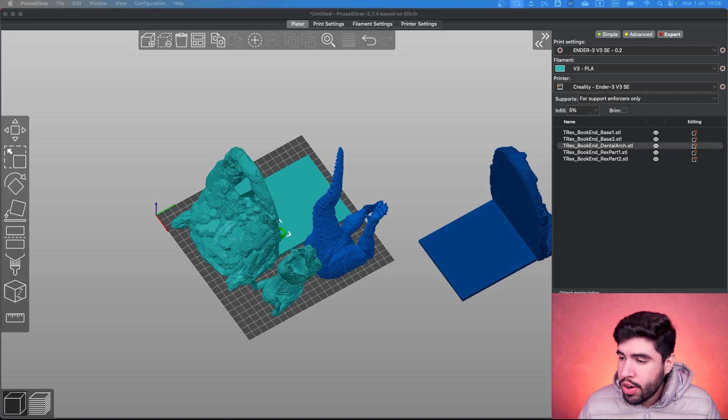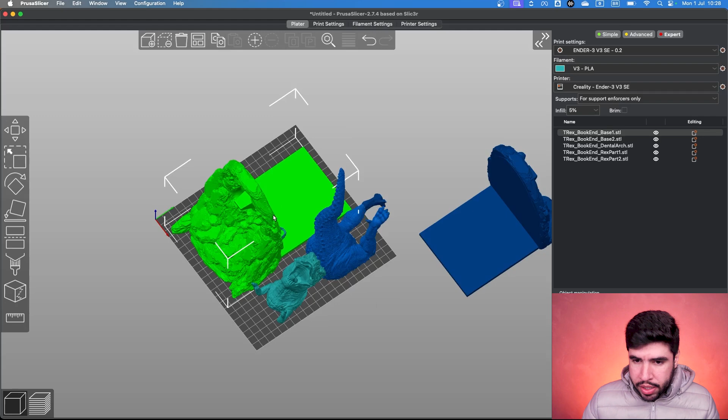Alright guys, as you can see, we have multiple parts to print this complete model here. We have the rocks and the dinosaur body. We are going to start with the easiest parts here, which are the rocks. They are simpler because we have more adhesion between the print and the build plate. Since the body that has more details is separate, we can print this with thicker layer heights to improve the

print time. Okay, so I'm going to use my standard profile for 0.32 layer height in this one, and then we are going to save some printing time. And now I'm going to show you which things you should change on your standard profile as well. The layer height, of course, 0.32, and in the advanced options, we have extrusion width, which I'm going to use

0.48 millimeters. Okay, this is because we have a thicker layer height and I want to increase the extrusion width as well to keep the layers attached to each other. Okay, I'm not going to change anything else. I'm going to use 3 perimeters, 6 top solid layers, 4 at the bottom, 5% infill. Let me see. And I'm going to keep the speed settings as well.

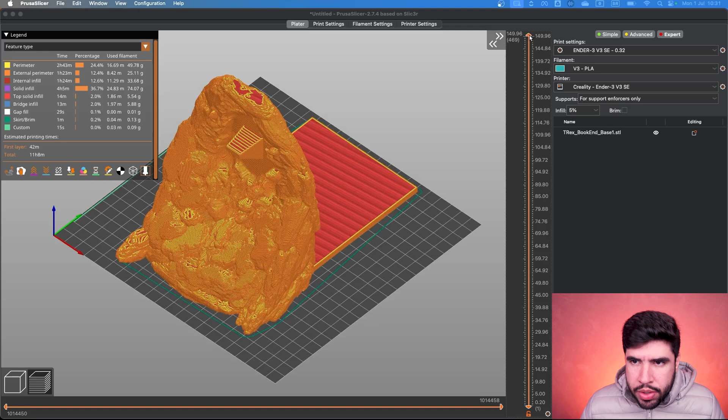These ones that you are seeing, I'm using an Ender 3 V3 SE, so I'm going to keep this low. Now let's slice this guy. Okay, I think we don't have any secrets left in here. As you can see, we have a good first layer on this print, and the thicker layer heights are going to give you a good texture as well in the rocks.

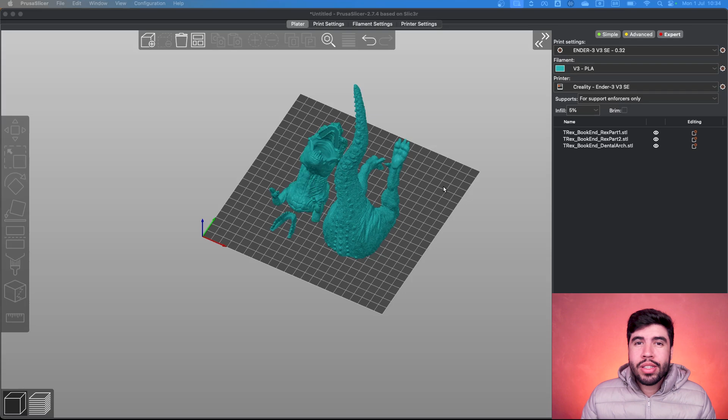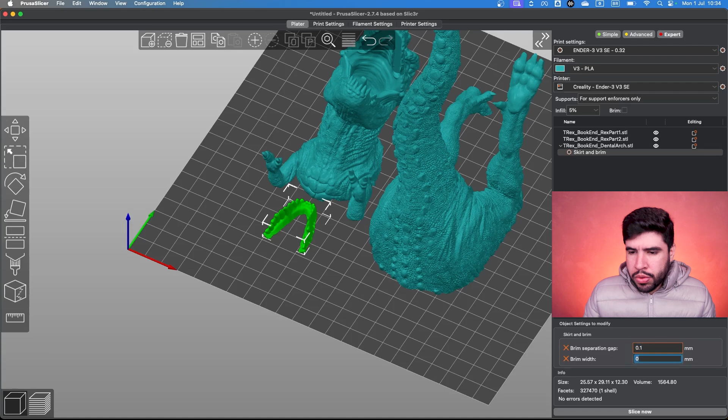So now let's talk about the body of the dinosaur. Now I'm gonna show you 2 tricks to print those parts together using as little brim as possible. Starting with the dental arch, you can right click on it and select add settings, and we have here skirt and brim, and we are going to put only brim on this one, and then brim width, and let's select brim separation gap as well. Okay, and now we can put 0.1 just to be easier to remove, and the brim width 5 millimeters.

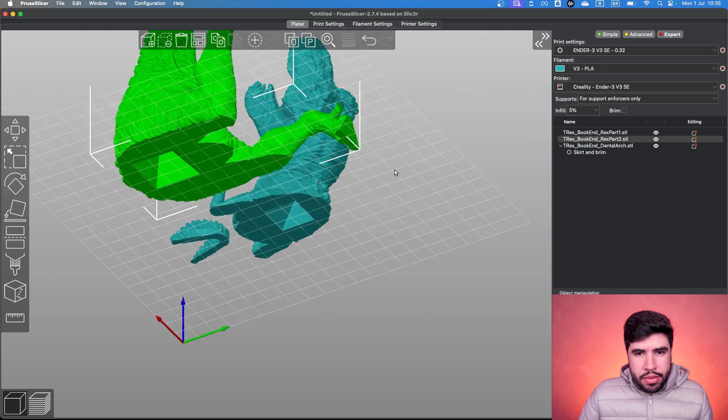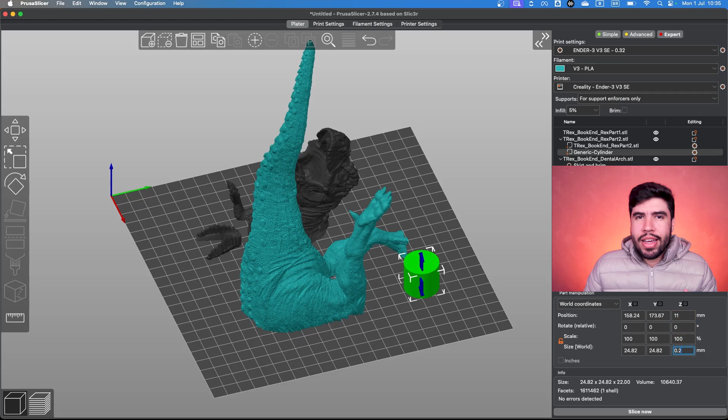And we don't need to use brim in the dinosaur's head, but the back part of the body has this part with less contact to the build plate, so we could use brim here, but we don't need brim in all this part. So I'm gonna right click on this model and add a part which is a cylinder, and now I'm gonna change the scale only in the Z option, and I'm going to put 0.2 millimeters, which is my first layer height. And now click this button, and the part will be at the build plate.

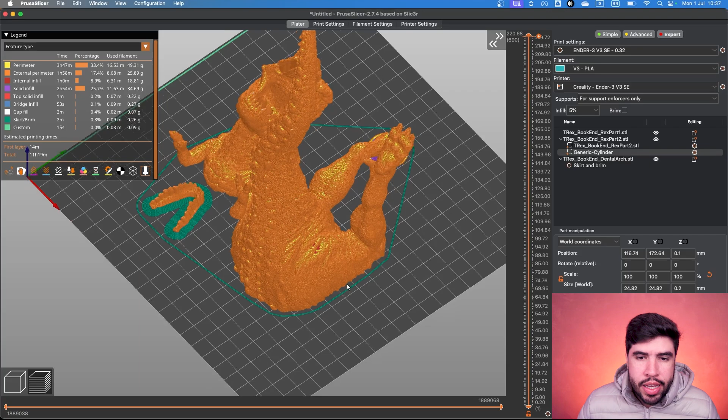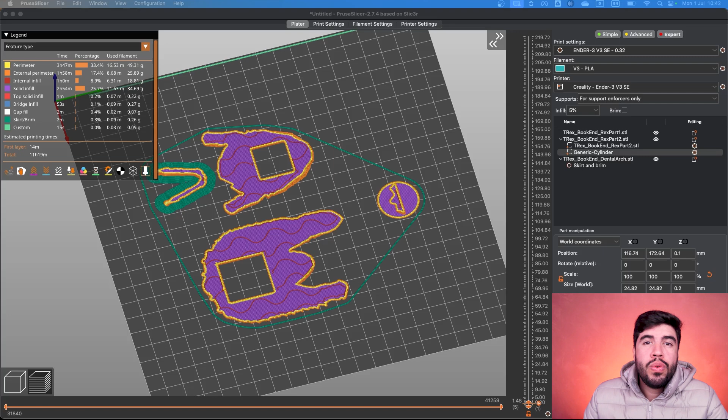And now we will add a contact adhesion area only for the foot. Let's slice it and I'm going to show you. And now we have brim on the dental arch and only on the foot, which is the only region that is necessary. As you can see, we have a good first layer in the body, in the head, and now we have a good contact region in the foot. And then you only need to remove it later. Just a side note, I don't like removing the brim, so that's why I do it like that. If you want to, you can put brim on the entire back part of the model.

Those tricks were about adhesion. Now let's talk about layer height. Those parts have a lot more detail, so let's use our standard profile 0.16 layer height. I'm going to use 3 perimeters as well. I increase the solid layers at the top and the bottom, and remember, you don't need to use 0.48 extrusion width as a standard anymore. You can use 0.42 as I'm going to use, or 0.4, and it will work as well. The result will be something similar to this.